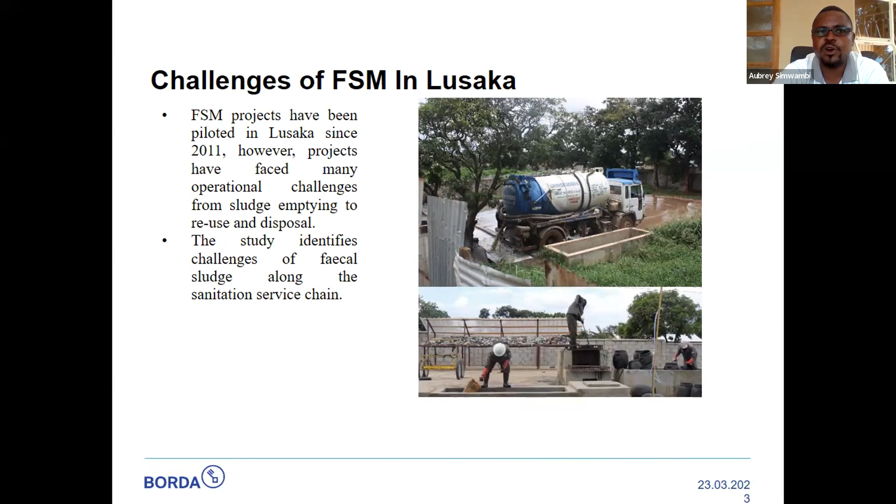So the study identifies the challenges of fecal sludge along the service chain, but at some point we also look at the value chain. So the first approach that we took is we measured the type and the content of solid waste that is coming from the on-site sanitation facilities. Then we also analyzed data coming from 10,004 households across 3 peri-urban areas, that is Chazanga on the northern part of the city, Chawama on the southern part of the city, and George, which is kind of in the

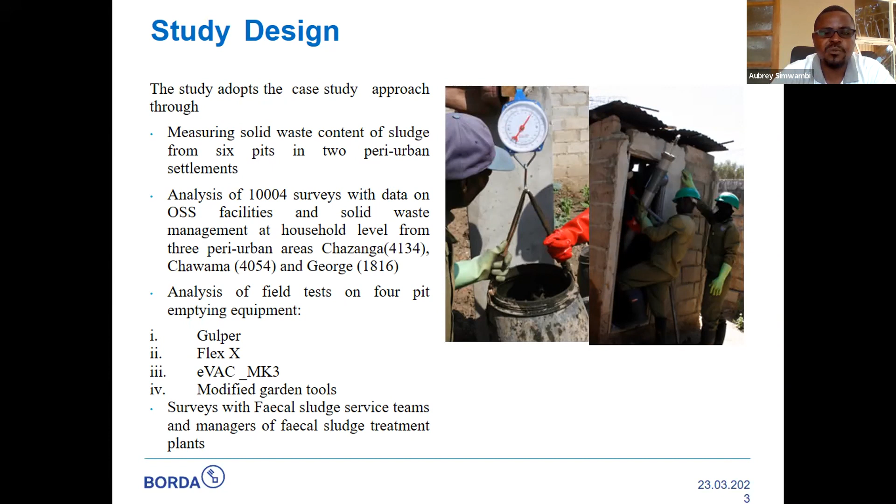southwest of the city. And then we analyzed the different types of emptying tools that are used to remove sludge from the on-site sanitation facilities, which we started with the Gulper, the Flex X, the EVAC from South Africa, and then we also analyzed the modified garden tools, which we mainly use when we are emptying pit latrines. We also did surveys with fecal sludge service teams and managers of fecal sludge treatment plants to understand the challenges that they are facing when it comes to sludge treatment, reuse, and disposal.

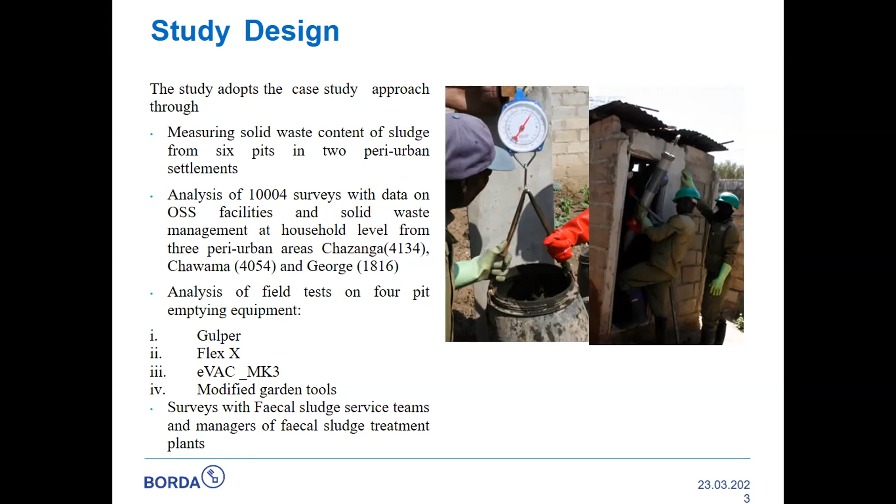So when we first go to the households, we wanted to understand how do they manage their solid waste. And much of the solid waste, we found that it's managed on site by the households. They usually dig trenches or pits in which they throw the solid waste, and when these pits get full, they bury them. In cases where they are dealing with types of waste which they do not want their neighbors to see, much of it is burned and some of it is thrown into on-site sanitation facilities. But where services for solid waste exist, you find that households which are able to pay are inclined to paying for these services so that the solid waste gets away from their premises.

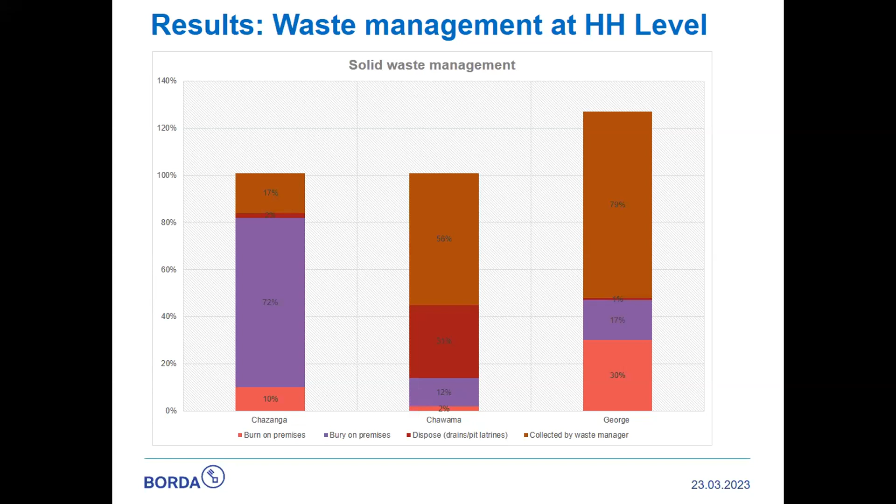So when we analyze this in relation to the services of on-site and fecal sludge management, we found that about 80% of the studied peri-urban households rely on pit latrines, and approximately 20% use flush systems. And these 20% who rely on flush systems have either septic tanks or cesspools as their containment facilities.

And when it comes to solid waste management, in whichever case you look at, you find that a minimum 1% of the solid waste generated in peri-urban areas ends up in pit latrines. So this 1% is the one which I mentioned, there are certain components, some of them which are cultural, which households, when they are producing them, do not want their neighbors to see. They throw them into sanitation facilities and they end up in containment facilities.

And we also did a test of how much solid waste is actually ending up at fecal sludge treatment plants, and we found that an average 150 kg per cubic meter of sludge that is reaching the treatment plant is solid waste.

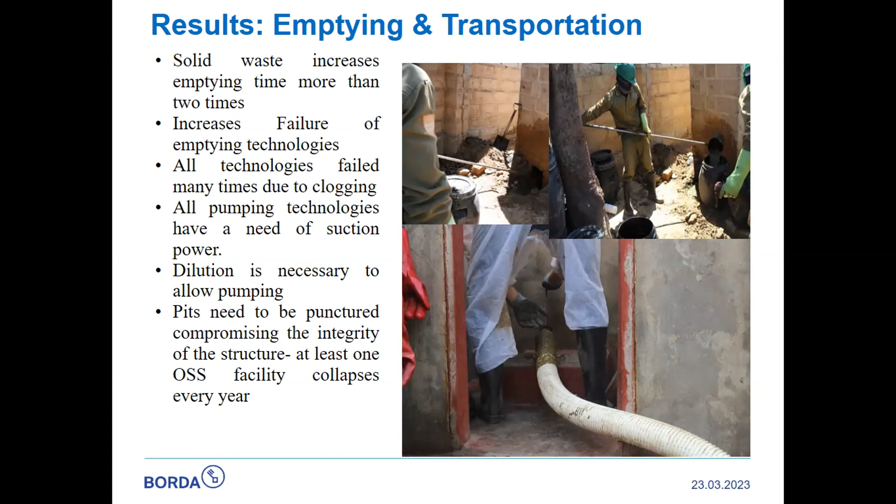Also, due to the presence of solid waste in the pits, they are also exposed to other ailments which are likely to cause them harm, such as razor blades which are found in there, some needles which are found in there. So sludge emptying is largely affected by the presence of solid waste in the pits.

When it comes to treatment, you find that treatment of sludge with solid waste is very difficult. Our pilot projects had huge challenges because of solid waste, because this solid waste has to be considered as highly hazardous. Hence, even when it's nicely separated and put somewhere for drying and transportation, to take it to the dump site, you need someone who's registered with the transportation of hazardous materials, because as we all know, we are in an industry which is a public health concern.

Hence, when it comes to transporting the solid waste to the dump site, this solid waste has to be put in a special area, away from where trucks coming from malls and supermarkets unload, because there are scavengers at dump sites. Hence, you do not want this solid waste which came from pit latrines and fecal sludge treatment plants to be dumped at the same point as materials coming from supermarkets.

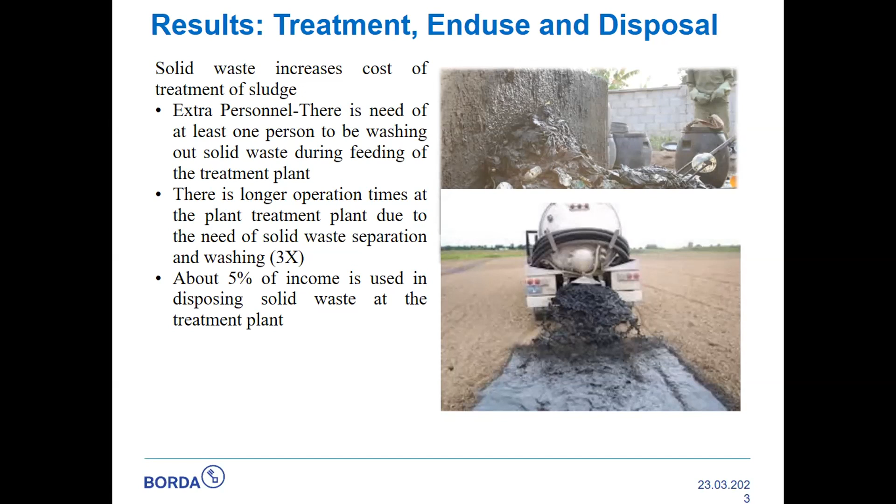And also, to manage the solid waste, you have to put in extra resources. Hence, 5% of the income generated from households for emptying services is allocated to the management of solid waste. So, lessons learned.

The solid waste thrown in pits by households is mostly due to lacking solid waste management options. Hence, if options for solid waste management are incorporated in the provision of fecal sludge management services, you find that the industry will even thrive, as technologies will even be advanced when it comes to emptying.

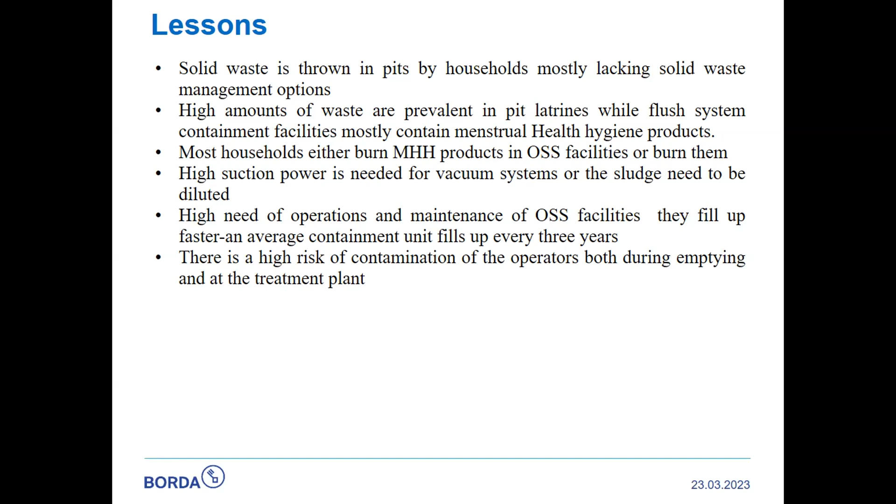is that there needs to be community awareness on solid waste, and solid waste management services need to be provided everywhere where on-site sanitation facilities exist. And also, solid waste management must be planned for in future FSM projects. That is, systems that enhance solid waste management services must be developed.

Services such as maybe tariff bundling, where the people who are providing fecal sludge management services are also providing solid waste management services, so that these two do not mix up in the on-site sanitation facilities, and this will make the life of our practitioners easy. Thank you.

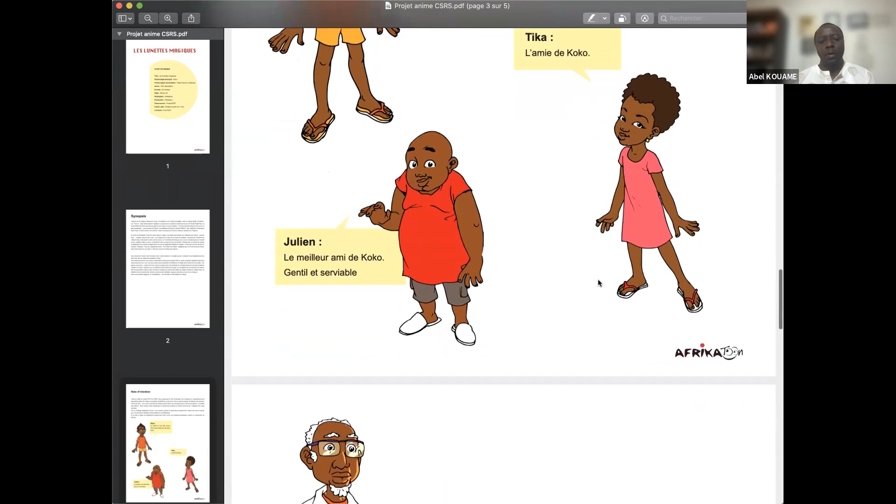So there is also Dr. Medicam. Dr. Medicam is a very important character, because this guy explains what the problem is when you decide to go outside, to go to, I don't need to say shit, but to go to shit and something like that. You also have Papa Popomi.

Papa Popomi is the father of the young main character, Koko, and he is one of the leaders of the village. So he is one of the guys who thinks and says that the people in the village are not obliged to have a restroom inside the house. So he's one of the main opponents to all the dispositions you can have around sanitary facilities.

After that you have the different characters inside the body, in the skin, in the blood, sorry, and different viruses and other characters. So they are also opponents. So the concept of the story is to say that

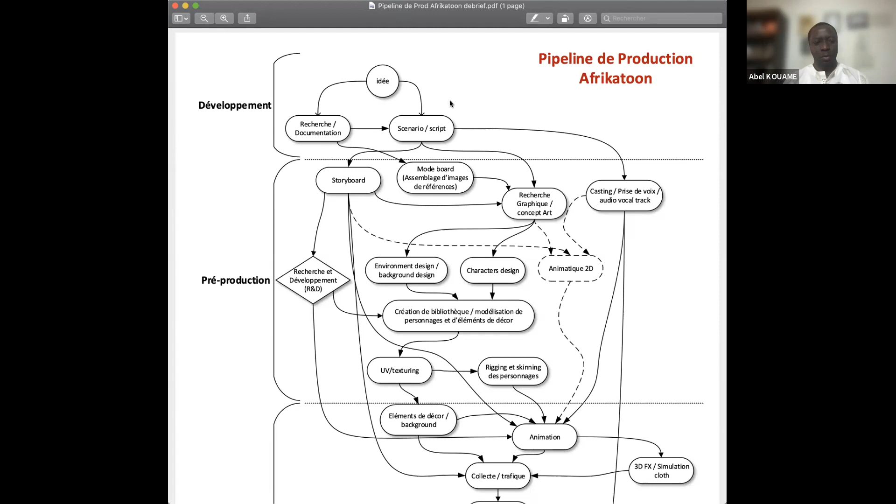And after we go to the pre-production. The pre-production is when we have the story, the script, and we go to the storyboard. The storyboard looks like a comic book, because we make illustrations to show the director what the different scenes look like, because we draw the different characters in the different situations. And we also have the mood board. The mood board, like just here, helps us to see what style of production, what style of picture, what technique we need to have. And for that, we take different productions from other studios, to see if this technique is good for our production.

And we have different steps in the pipeline that you can see. We have the research, graphic research, and the concept art. You have the casting, because sometimes everybody thinks that we must make animation first, and after we take the different characters to record the voice. It's not true. The reality is that we begin first with the casting. We make the casting for the different actors to record the voice, and after that we begin the animation. So when we finalize the casting of the different characters, the graphics, the concept art, the storyboard, we can now begin the animation.

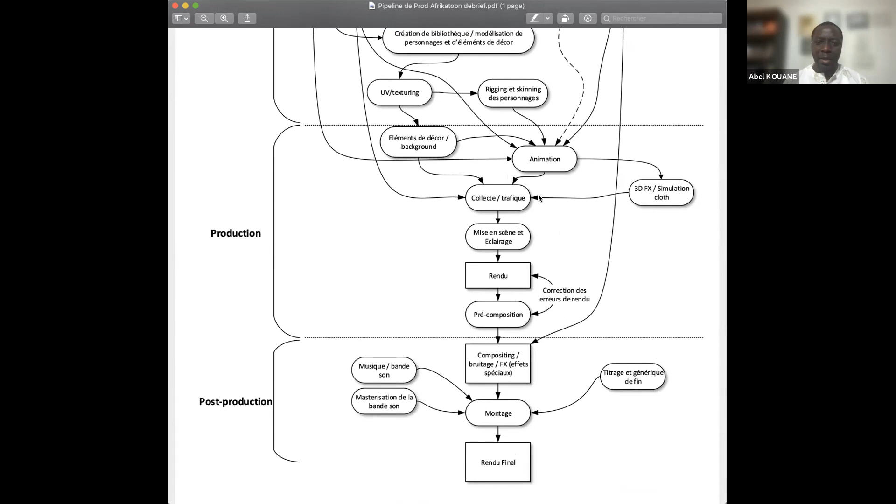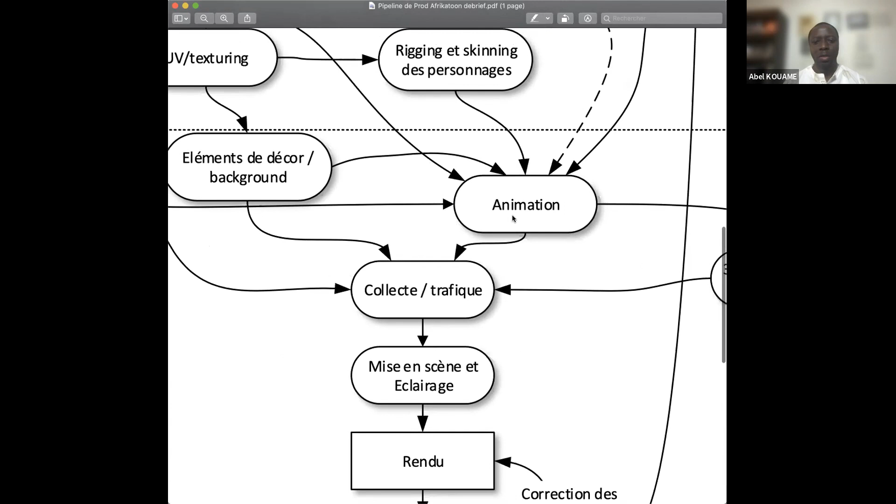So after the pre-production step, we go to the production step. The main step in production, like you can see, is the animation, right here. All the elements go to the animation step. So animation is one of the biggest steps when you produce an animation. So we make animation, we begin the background, different areas, to bring after the different characters into the environment. You have the different simulations when we make the production. And after, we take all that and we bring it to the rendering.

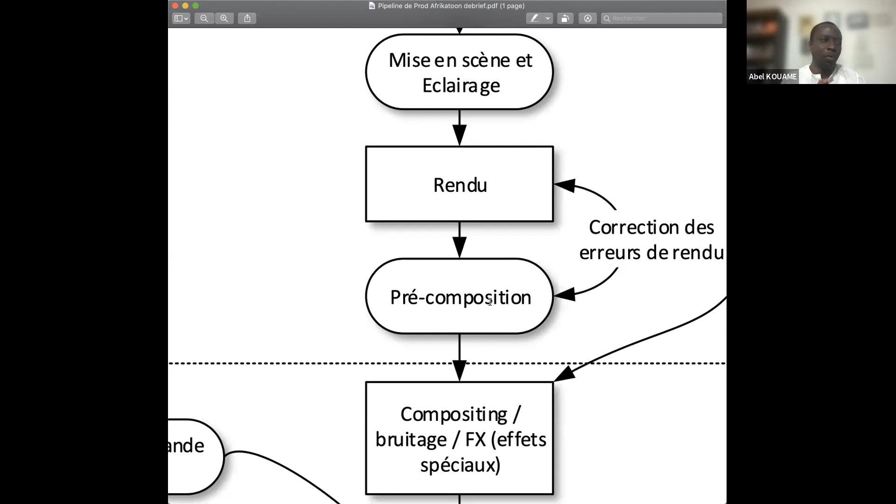And we begin the pre-composition, because we export the different layers of the production. We export the rendering of the character, we export the background, and so we have different layers for different kinds of elements of the production of the scene.

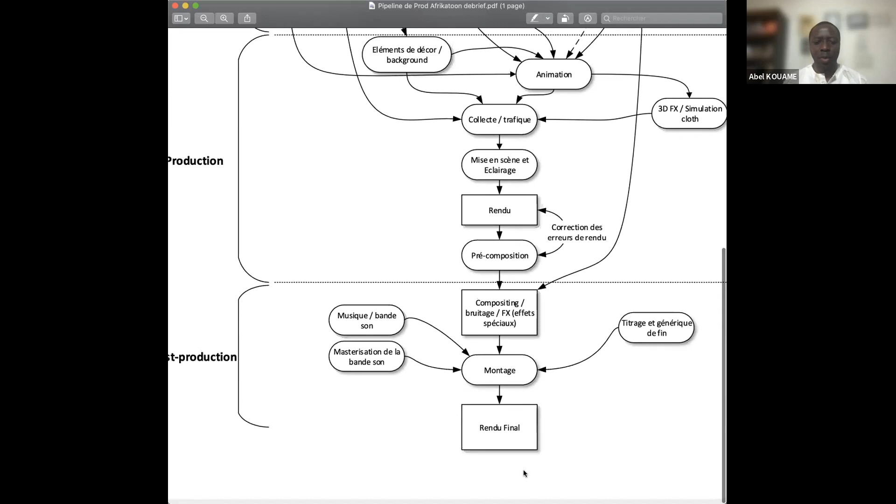So at the last time you have the compositing. So in the compositing, we bring animation, we bring the sound, we bring all the elements, the music, and after that you make the final rendering. So those are the different steps to produce, and those are the different steps that we used to make Koko and the Magic Glasses.

So I represent the Center for Water and Sanitation at CEPT University, which is a university focused on human habitat. And at the Center for Water and Sanitation, the project on Sinnar is a part of a whole host of sanitation projects where we have been supporting state and city governments improve sanitation in their city, and we have particularly focused on FSSM, fecal sludge and septage management.

When we talk about sanitation in India, we know about the Clean India mission or the Swachh Bharat mission, which has achieved significant success in making India open defecation free. And the next stage for India, where the government is focusing on the entire sanitation value chain, along with safe collection, treatment, and reuse as part of the second phase of some of its flagship missions like AMRUT 2.0 and SBM 2.0.

Now, in India, while many cities do have sewer networks, most small and medium towns, so not Delhi or Mumbai or Bangalore or Chennai, the majority of cities in India are small and medium towns, and they are fully dependent on on-site systems. And as per the last census in India, about 48% of the urban households were dependent on systems like septic tanks, which are not connected to networks.

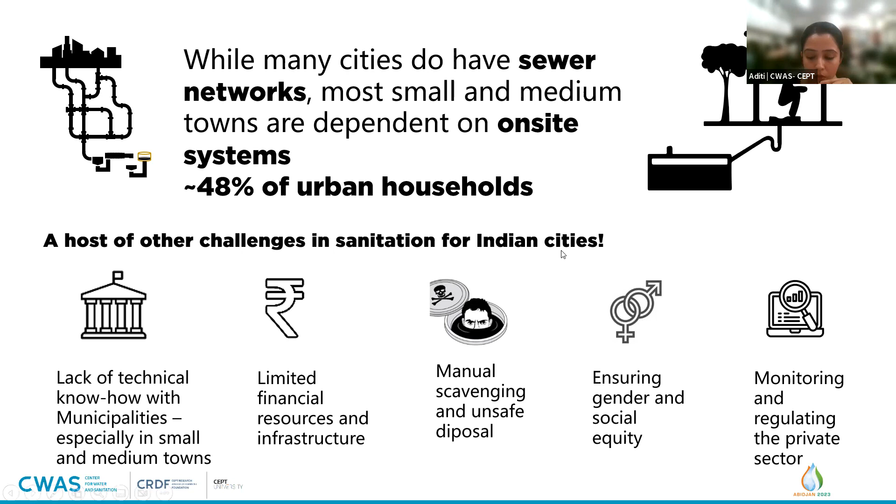And again, when we talk about citywide inclusive sanitation, we have to look at ensuring gender and social equity, and also monitoring and regulating the private sector. So these are some of the issues that are there in sanitation for Indian cities. Now, if we come to Sinnar city, we have been working with this city since 2012-13, my organization has been supporting this city improve its sanitation for a long time.

Sinnar is a very fast growing town, and it has a flourishing industrial district. Why we decided to make a movie on the sanitation journey of the city was, firstly, it is a good way to showcase the work from the funder perspective and also the city government perspective. But for us, it's more important from the perspective of advocacy, and we can use it as a capacity building tool. And this movie, we have shown to other cities in the state, we have shown it to higher levels of government, we've shown it to partners who like us are supporting other cities across India.

And we've shown it at international conferences such as the FSM conference, and we've even shown it to students to create capacity and also spread the knowledge about the innovations that we have and what works in Sinnar.

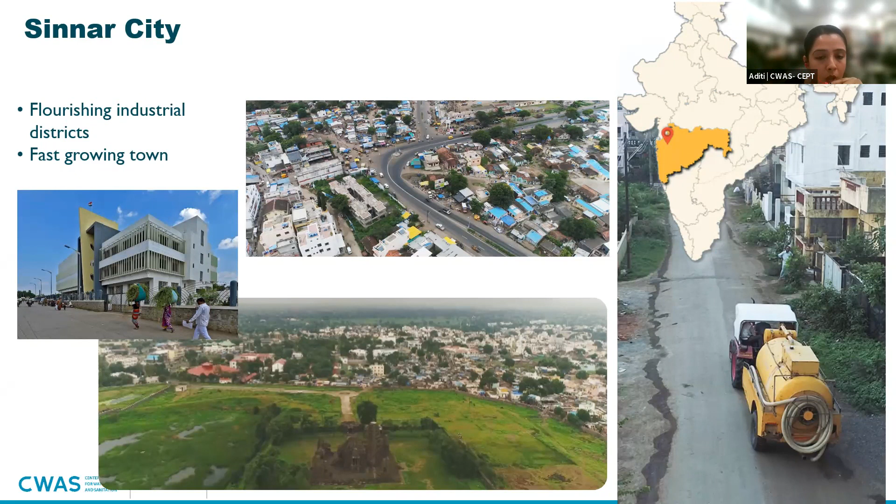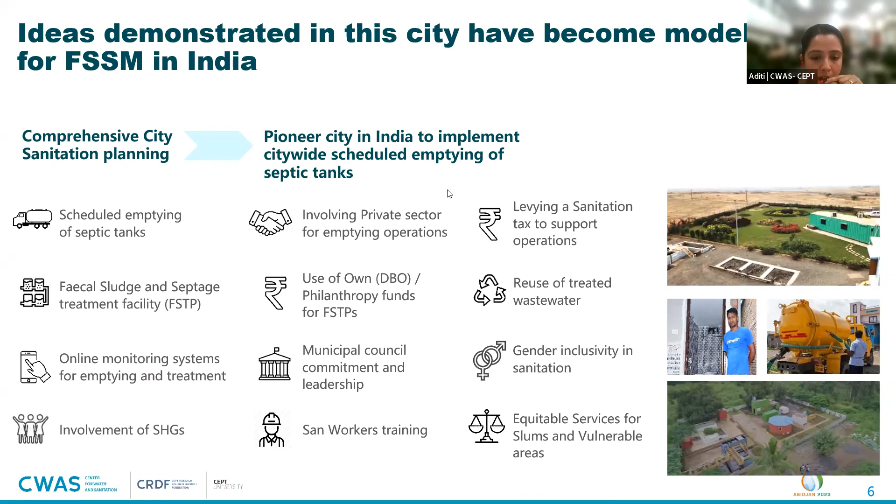Now, the ideas that we have tried out in this city have become sort of models for FSSM across Maharashtra, which is the state that Sinnar is situated in, and across India. And we've moved from comprehensive city sanitation planning right in the beginning to Sinnar being one of the first two cities in India to implement scheduled desludging of septic tanks, and now more to citywide and inclusive sanitation. And these are some of the concepts we have demonstrated.

When we started working in the city, our idea was to address the full sanitation value chain, which is from access, collection, conveyance, treatment to reuse. There was open defecation in the city, and there was high dependency on community toilets. However, this was later on addressed by the Clean India mission and the city's own pioneer toilet subsidy programs.

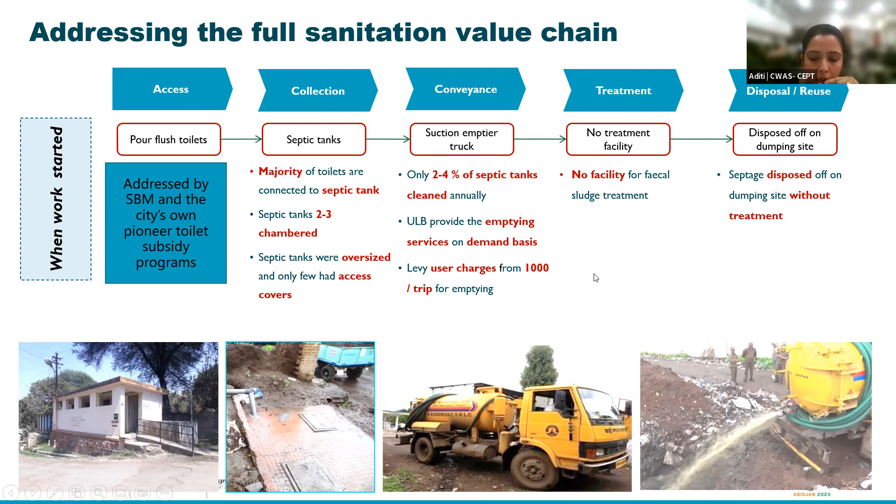But what I'm going to talk about is the rest of the sanitation value chain, and there were issues with septic tanks. Not enough septic tanks were being desludged. There was no treatment facility, and the city had only one truck. And as you can see, the septage at that time was disposed of at the solid waste dumping site without treatment on the ground. So it was a very alarming issue.

With the help of the Swachh Bharat mission and the toilet subsidy program, Sinnar was declared ODF, open defecation free, in 2017, which means that everybody had access to either individual household toilets or toilet facilities in their vicinity. Next, and even while this was happening, the city started thinking about how to take care of the rest of the service chain, and the city government rolled out this government resolution which said that we are going to implement citywide fecal sludge and septage management.

We will involve the private sector, which means there will be a budget component for it. We will allocate land for a treatment facility, and we will levy some taxes, which is a big sort of commitment to get from the city. And this has helped to sustain our efforts, even though leaders will change or chief officers will change. The most important thing they agreed to do here was that they said we will do scheduled emptying of septic tanks. And when I talk about scheduled emptying as an innovation, it came from us recognizing the need for a systemic change.

And the idea was that the current practice of desludging in Indian cities is not a public service the way sewerage systems and door to door solid waste management is. And it is more of a complaint redressal model, which leads to a low frequency of desludging, and that in turn leads to high cost of desludging, and then discourages regular desludging, and there are environmental impacts, and then that in turn increases the chances of manual scavenging.

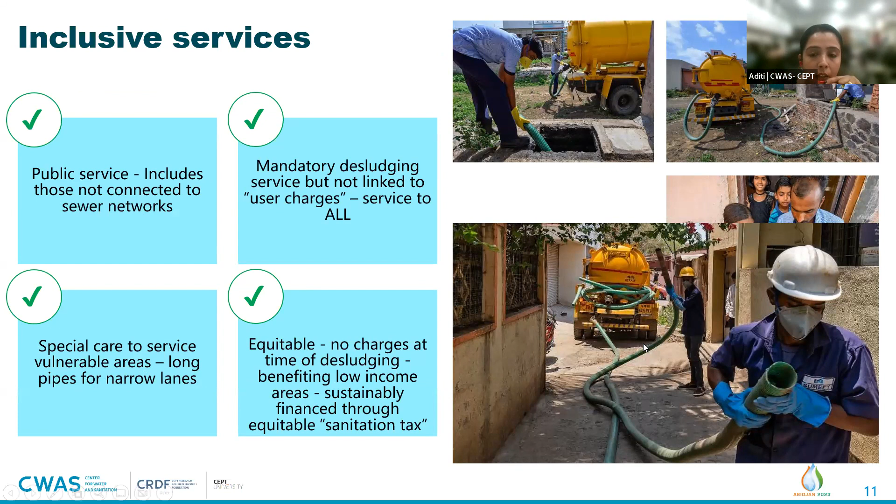Awareness generation has been a key feature for success of high uptake of the services, and there have been door to door awareness initiatives, wall paintings, information leaflets on what is expected, what you need to look at when the desludgers come to your house. There was this video that was circulated on local WhatsApp groups, and we tried out this SMS intimation that tomorrow, 2 days later, is your turn.

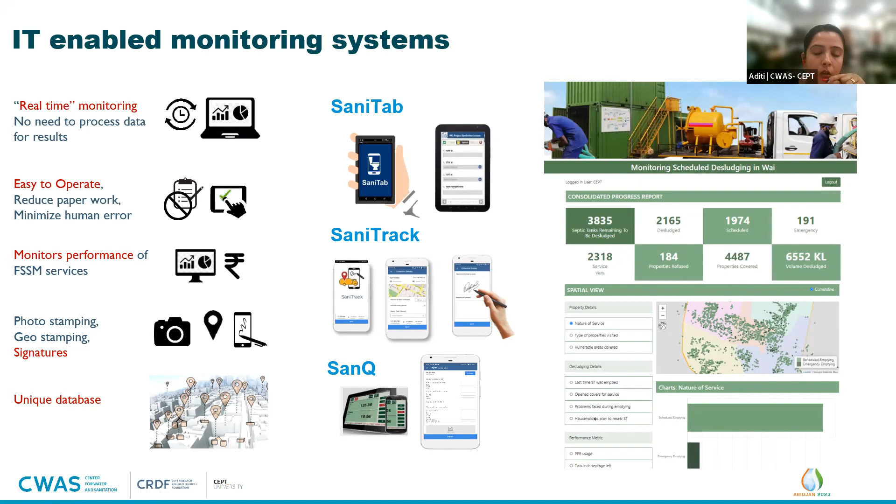So those sort of things. We've also tried IT-enabled monitoring systems, so digital monitoring systems, and we have these kind of dashboards which show how many households have been emptied, and a host of other information points.

Now, because scheduled desludging was done, and earlier there was no treatment, now there was an increased amount of septage being generated. So the city set up this fecal sludge treatment plant, which was inaugurated on the first day of scheduled desludging. So it was ready right from the beginning.

This is a 70 KLD treatment plant, and the best thing was that this was funded by the city's own funds, and the city managed to use some of the regular grants received by all cities, and develop this FSTP by engaging a private operator through a design, build, operate sort of contract.

This treatment plant is not just a facility. We've tried to develop this into a resource center, because Sinnar hosts a lot of visitors who come to see the sanitation innovations. So there's a resource facility here. There is landscaping around the area, and this is a sanitation resource park is what we like to call it. This is fully self-sufficient with solar energy, and we like to call it a net zero facility. And there are again more digital monitoring systems for looking at treatment quality parameters.

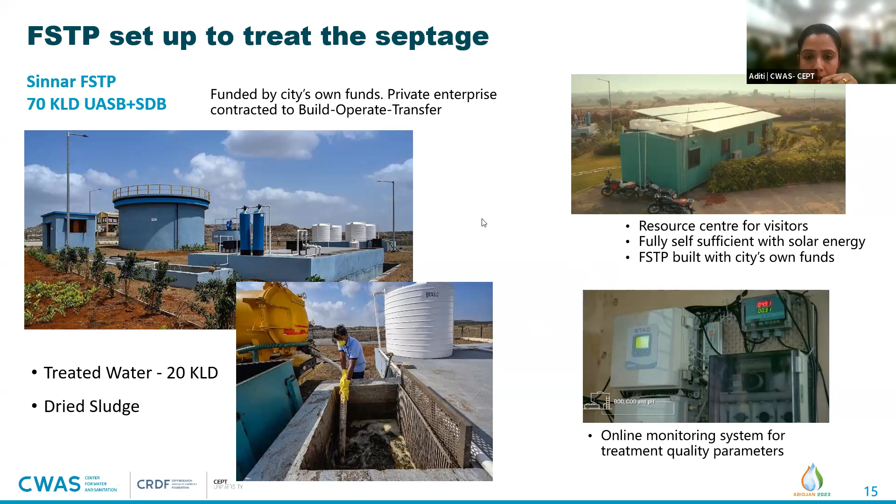Now, like I said, there is landscaping on the site of the fecal sludge treatment plant, and the treated water that is generated is not thrown away. It is reused for development of a garden. And if you can see at the back, there's an urban forest, 8,000 square meters of urban forest and landscape area has been developed in the midst of a barren land. So if you see this very green image, this was not green before.

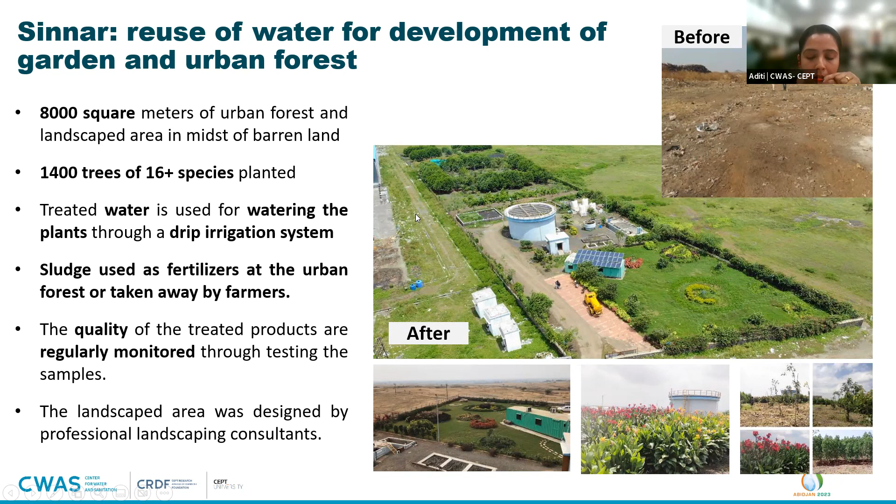Earlier, if you see the before site, this is a very rocky area, and due to reusing this water and doing this landscaping and developing this urban forest, this area has been transformed, and there have been environmental and social benefits. So the area has become greenified, and biodiversity has increased in terms of the birds and the species, the flora and the fauna.

Now, the maintenance of this landscape and urban area is formally contracted to this women's group by the city government, who are also given handholding support and trainings, but then they are tasked with maintaining this, and that builds their capacity and also gives them a livelihood.

And so far, more than 16 million liters of water has been reused. And if we look at the urban forest, an equivalent of 21,000 kg of CO2 has been sequestered in the trees by reusing this treated water and the solid products.

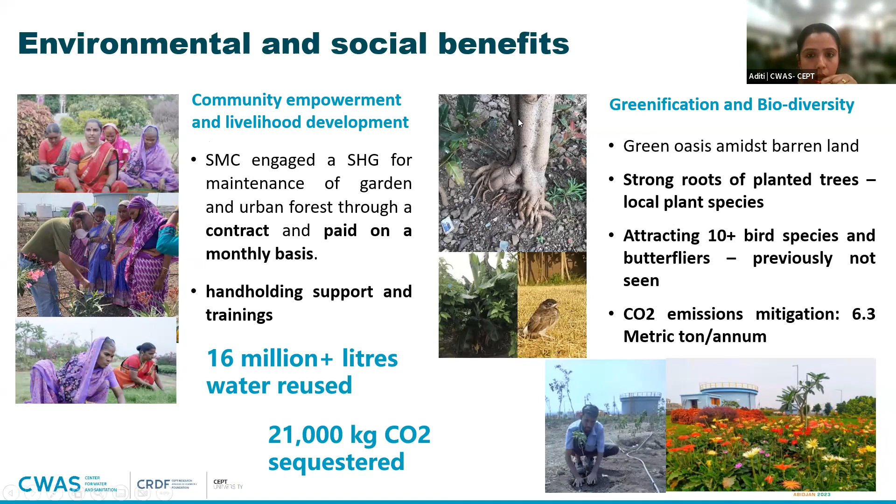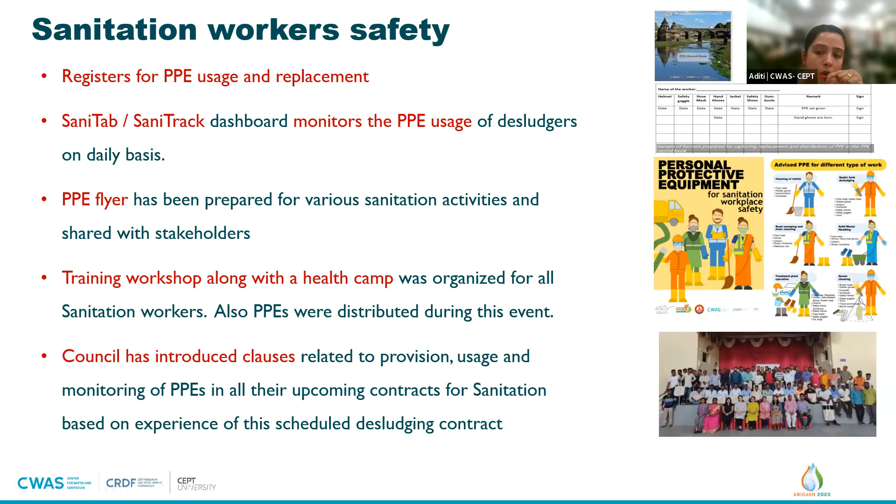We've also worked on sanitation worker safety, so that is also a component of our program. And while we take care to track and monitor that personal protective equipment is used during desludging, we've also done a lot of trainings, health camps, and looking at the contract clauses which ensure some social benefits and their safety.

We've also worked on empowering women for inclusive FSSM service delivery. So we've done trainings for elected women representatives. In Maharashtra, there are laws that ensure that the elected leaders have equal representation of women. But many times the women that get elected do not know a lot about what is happening in the city, and they are not equipped to be very active decision makers. So that is something we've tried to do with them, by letting them know about the sanitation work in the city.

Now the city was fully dependent on on-site systems, so there was no sewer network. Now that on-site systems are well taken care of, there was the issue of gray water. So the effluent from the treatment plant, and the water from bathrooms and kitchens, which is not toilets, would flow in open drains in the city, and then eventually connect to one of the local river streams.

What the city has done is they have been implementing this I&D network, which is basically interception and diversion. So they intercept the open drains or nalas, and then that is diverted, and may in the future be treated through a proper gray water treatment plant.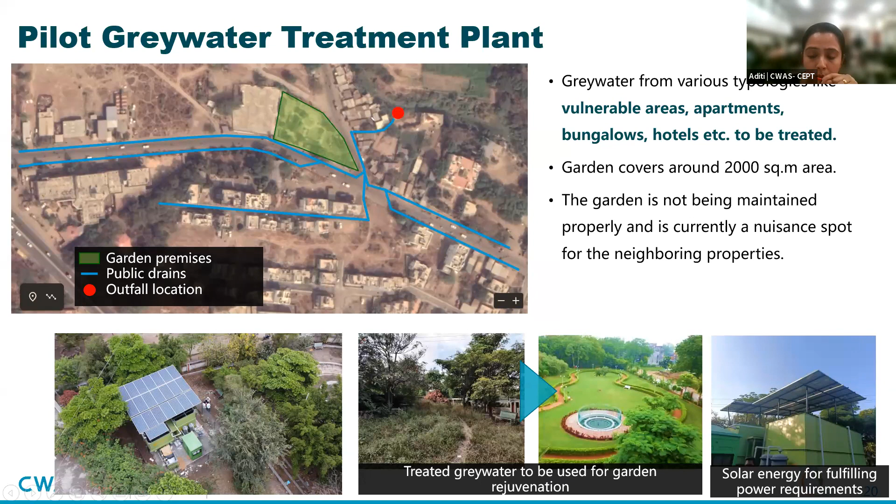This facility is again fully powered by solar energy, and because of the success of the women's group at the FSTP, here another women's group has been contracted to work at this pilot grey water treatment facility. And this is slightly more technical work, but they have been very successful.

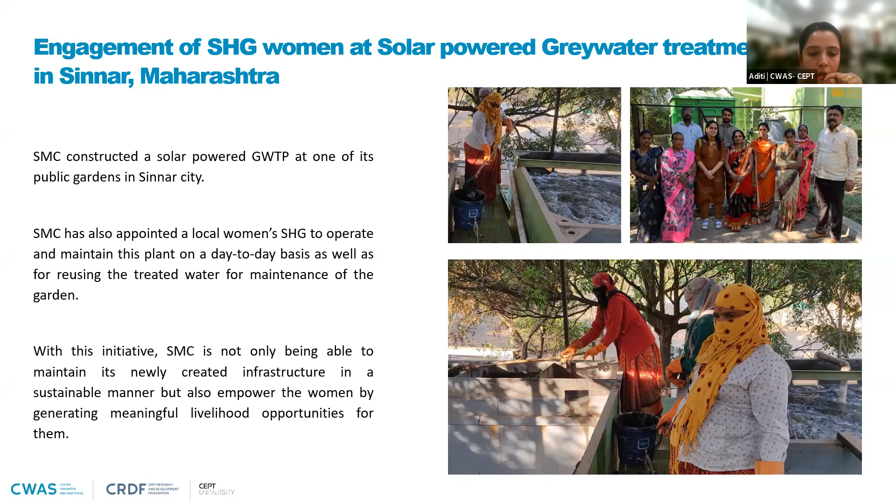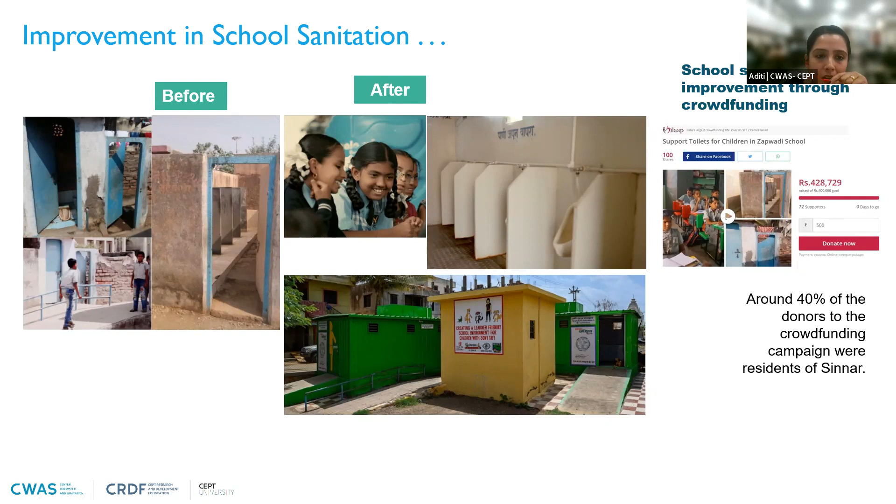We found that around 40% of the donors in this crowdfunding campaign were residents of Sinnar. So that was a very encouraging thing. And lastly, now that open defecation has stopped, there was a proposal to develop this old common OD spot, open defecation spot, into a beautiful public space to discourage reverting to old habits.

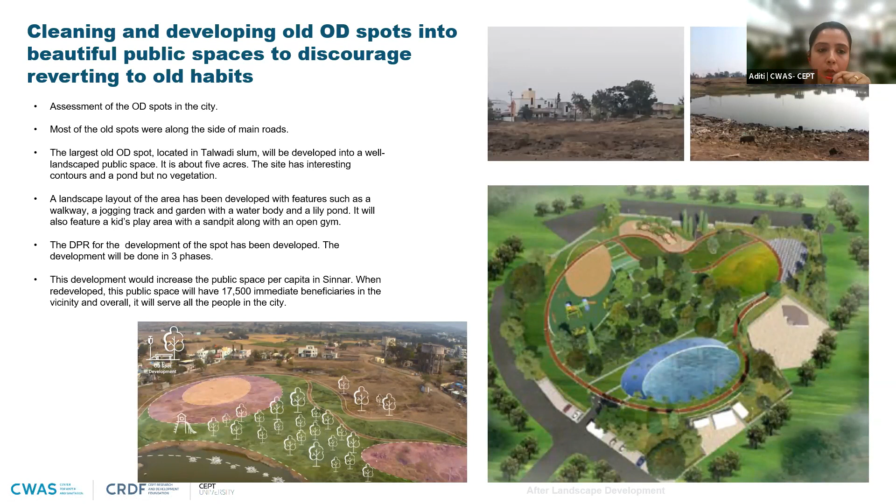And the lesson here is that this is not a one-off pilot or something that has been done in one city. Because we are partners to the state government in Maharashtra, we have scaled these lessons through policy guidelines and through our networks to be done in more cities. And all the materials and tools we have developed are available in the public domain. That is the way we are trying to scale up lessons and innovations from Sinnar to other cities. So yeah, thank you.

Thank you so much, Aditi. That was a great presentation. All the presentations were great. Through each presentation, we've seen the work behind the videos that were submitted, and how films can entertain, educate, inspire, and inspire a call to action. As we've seen with the Zambia one, a great example of Sinnar, which hopefully can be scaled throughout all of India one day, and Coco et les lunettes magiques, which is entertainment but also educational. So really great videos.